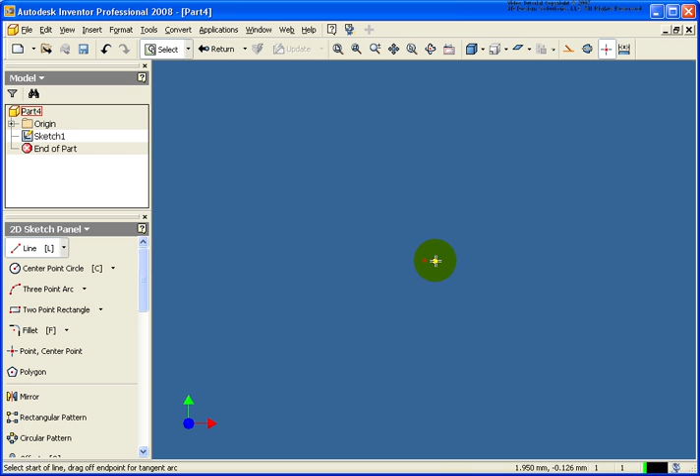In this lesson, we're going to cover how to mirror a sketch and how to work with the symmetry constraint. I'm going to start off by starting a new part file. And what I'm going to do is I'm just going to sketch a few lines that are going to represent the left-hand side of a symmetric part.

What I'm going to do next is I'm going to place in a line that will be my line of symmetry, or in this case I'm going to mirror the left side lines over and around this line right here. What I'm going to do is I'm going to turn this line into a center line.

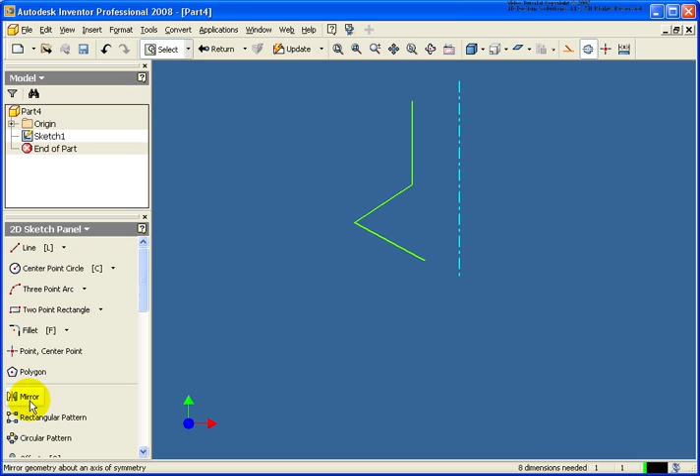Next I'm going to go back and select the mirror tool from the 2D sketch panel, and where it says select the objects, I'm going to select the left hand objects to mirror, and then select the mirror line button, and then in this case I'm going to select my center line and click apply, and I'm done with the mirror operation.

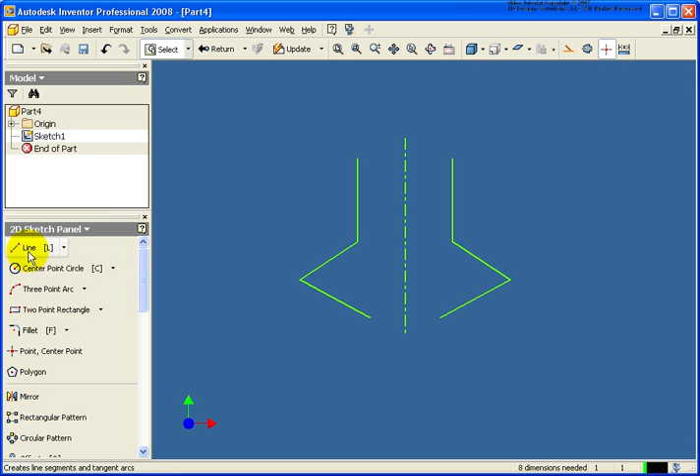And what I'm going to do next is I'm going to connect the two different sections here with the two horizontal lines. Now you'll notice as I go back and stretch the edges just by dragging them, you can see it doesn't matter which side I actually drag because they are symmetric about the center line here.

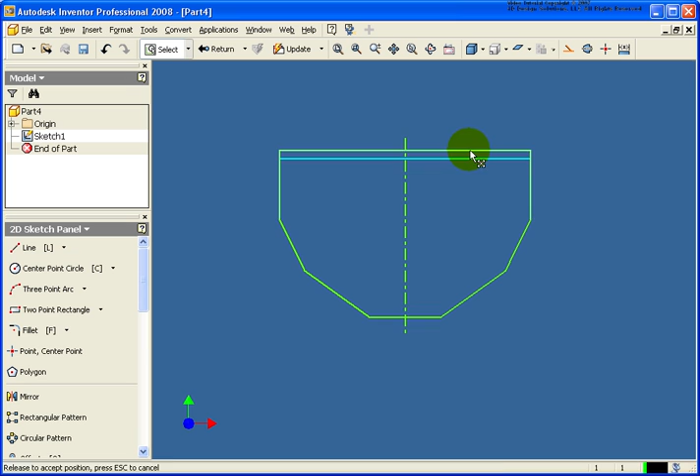I can also go back and apply a couple dimensions. Just hit D on the keyboard. Let's make that 15. Let's apply an angle constraint. Let's make that 165. And you can see everything is changing.

And it doesn't matter, by the way, if I would change a dimension on the left side as well. So if I would go back and make that 17, you'll see that everything is symmetric exactly the way that you would hope that it would be.

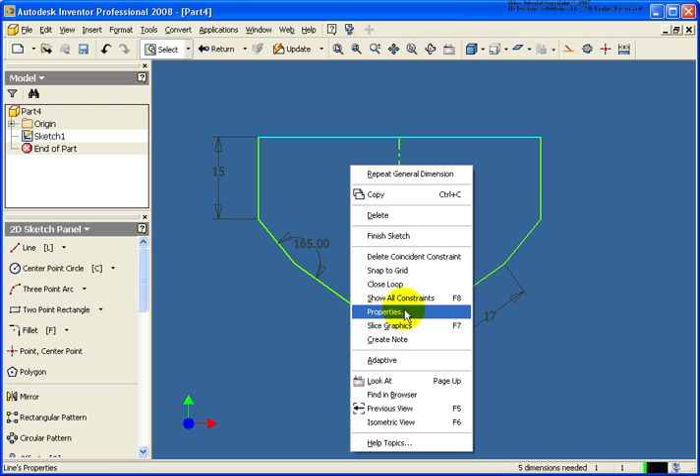So what we're going to do next is we're going to take a look at the constraints that were applied. So I'm just going to finish out of the dimension tool. And what I want to do next is let's go back and show all of our constraints. And the constraints that I'm looking for are, let me just drag this one over. It has the symmetric icon to it.

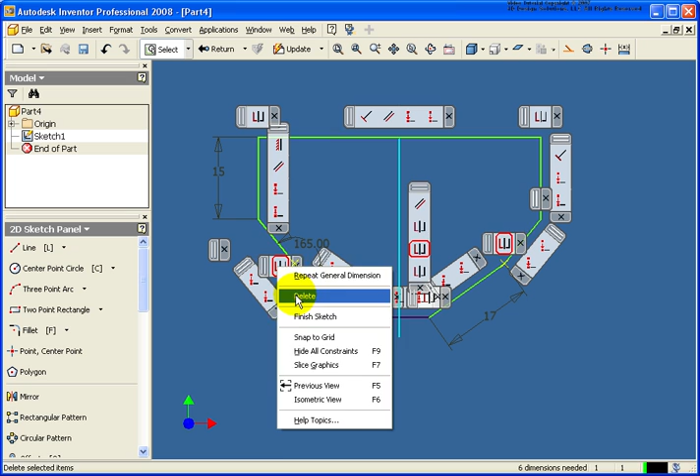And what I'm going to do is just go ahead and delete some of these. And you can see which ones are being deleted here. Just delete a few of those. And let's hide the visibility of our constraints. So now, as I go back here, you'll see that I no longer have symmetry between those segments here.

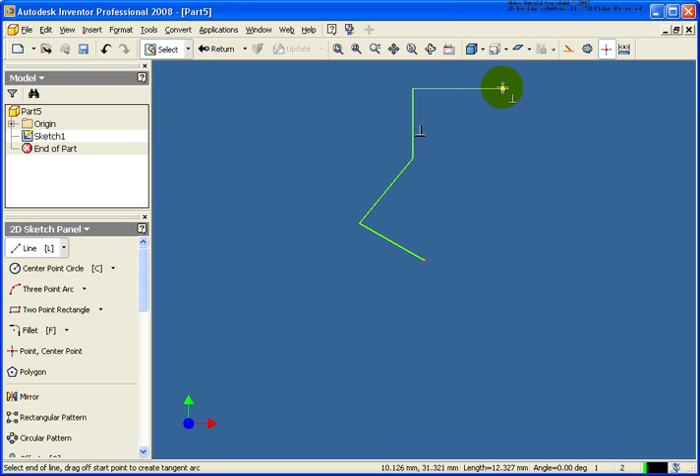So I'm going to start up a new part file, and we'll do just the opposite. In this case, I'm going to draw the same type of line segments, but I'm going to draw it as though it's going to be a completed model here, even though we'll make sure that it's not 100% symmetric here. But you can see I'm following somewhat of the exact same rules here.

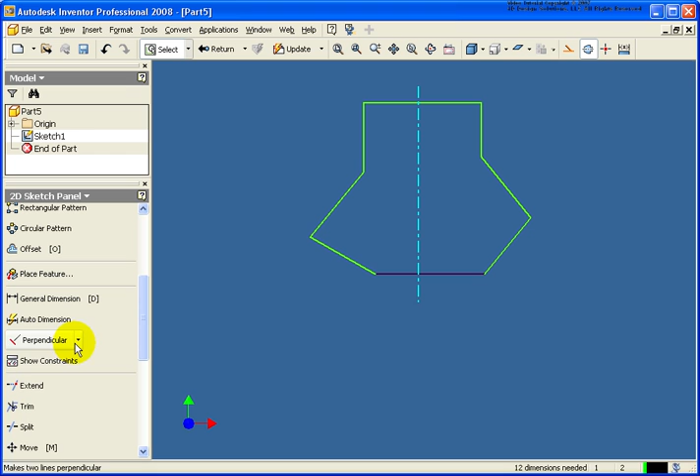I'm going to draw a line of symmetry. I'm going to go back and I'm going to change that to a center line. And what I'm going to do now is I want to go back and manually add a symmetric constraint. So in this case, we'll just go back, click on symmetric,

and I'm going to select the first line and the second line that will be symmetric to it. And then the third selection is going to be the line of symmetry. And now I'm just going to continue to work my way back and forth. And you see I didn't have to go back and actually select the center line again. Since I'm still in that same set of tools, it's going to remember what that center line is.

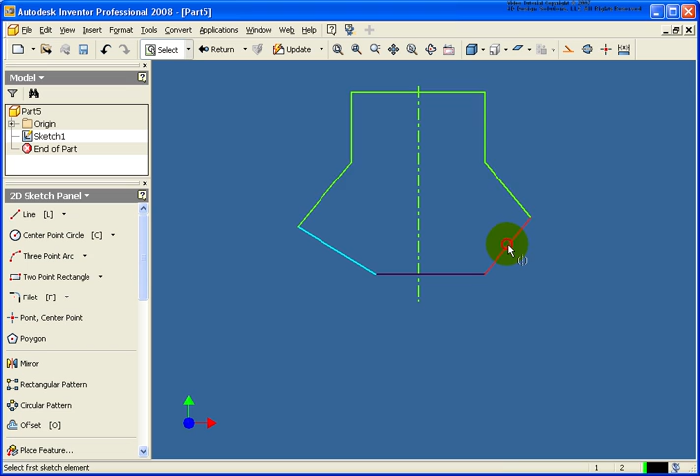So right click, done. I'm pretty much done with those. And again, if we go back and start to drag those points out, you can see that everything is symmetric. So let's just kind of finish this off.

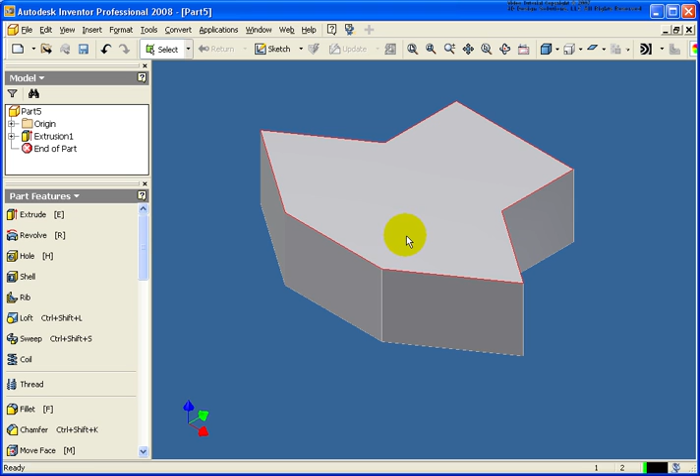Now if I would go back and extrude this, you'll see that the center line will be consumed. It's still part of the sketch, but it's basically a construction line that we're not going to be able to see when the model is created.